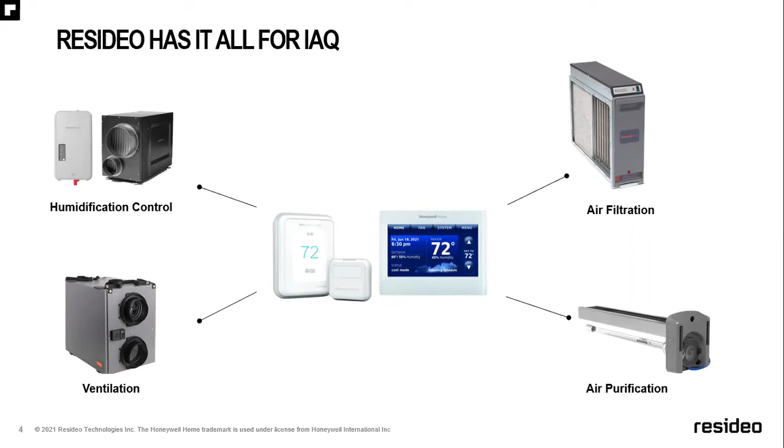I always like to start off by saying Resideo is not a one-trick pony, if you will. We actually are a very well-diversified company in terms of our offerings. Many people think of us as just the Honeywell Home thermostats, but we also are very much involved in the IAQ world. We have everything that's necessary to control your indoor air quality.

One of the reasons why I like ventilation is because it is sort of like the redheaded stepchild of the HVAC industry. We tend to think that we're the HAC industry, if you will, and sometimes the V gets left out. So it's really fun for me to teach on this and to introduce this sometimes to people, but also refresh some people on what ventilation does and why it's important and how to do it right.

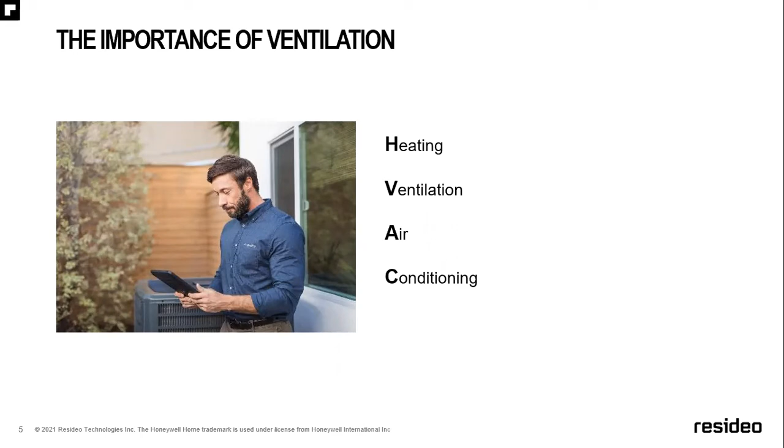So anyone who's been in the industry for any amount of time probably has heard the saying that houses need to breathe. And I always chuckle when I hear that phrase. The truth actually is that people breathe, but houses really don't need to breathe as much as we tend to think.

There's a lot of indoor pollution that can be a factor inside the home with IAQ, but there's also a lot of stuff that comes from outside. Our houses tend to act like big filters. And then of course, anything that we bring inside that has nasty stuff in it, pressed wood and formaldehyde is common, but also candles and deodorizing sprays, and those point us to the fact that not all indoor air pollutants are bad. They might be things that we want to watch out for, but nobody's going to tell you that you can't burn a candle in your house. But we have to recognize that all of those things do release things into the air.

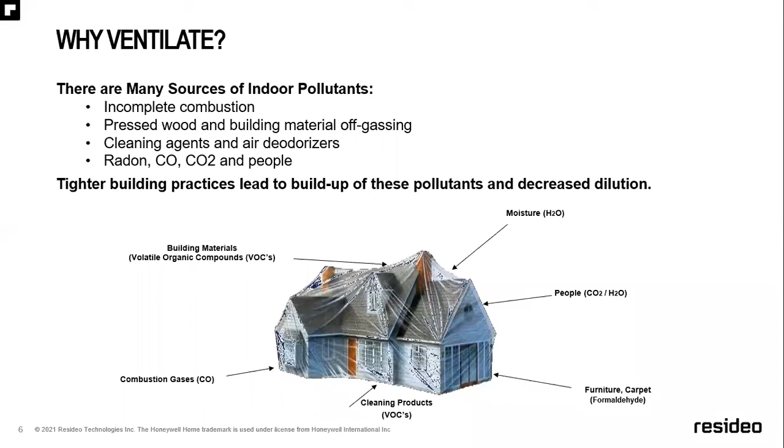So lots of stuff going on inside the house, and it's important to understand all of those things that are there. And we certainly have products and technology to help us mitigate all of these issues. But the best strategy anyone would tell you is that if we can dilute these things down to a level where they are not significant, then that is one of the best strategies. And so ventilation is where that comes in, because with ventilation we're able to actually dilute the concentration of everything that's in the house with fresh air.

So obviously we spend quite a lot of time in our homes. 90% of our time on average is spent in the home, and so we want to make sure that we have good air. Obviously indoor air pollution is a problem if we don't ventilate, but we can also have things like excessive moisture. Depending on the climate that you're in, you can have vulnerability to gases, like I said before. Mold and mildew can become a problem when you don't control for ventilation or for humidity in the air. So lots of things can happen if we're not watching out. And everybody kind of knows that. Most of us have experienced that in some way or another.

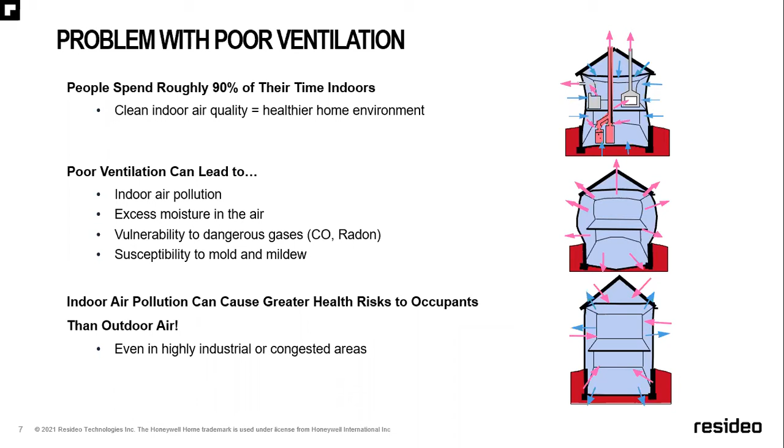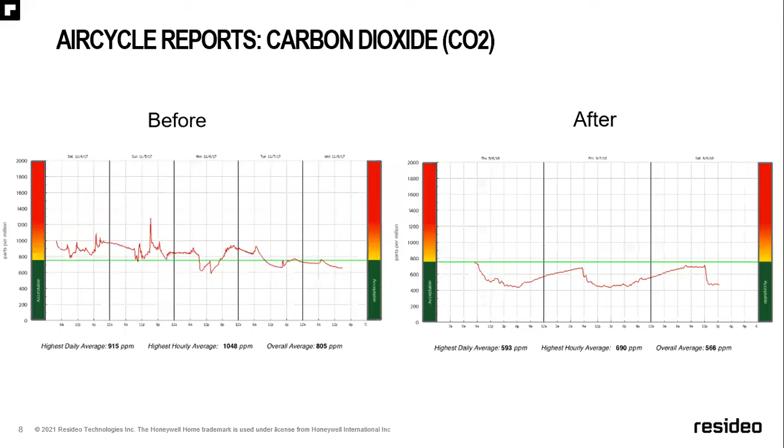And then you see down here on the after introducing ventilation, we're able to bring that down and actually keep it below the line at all times. There's still going to be fluctuation, and usually with carbon dioxide, that has to do with what's going on inside the house, like if you're cooking or if there's a lot of people there.

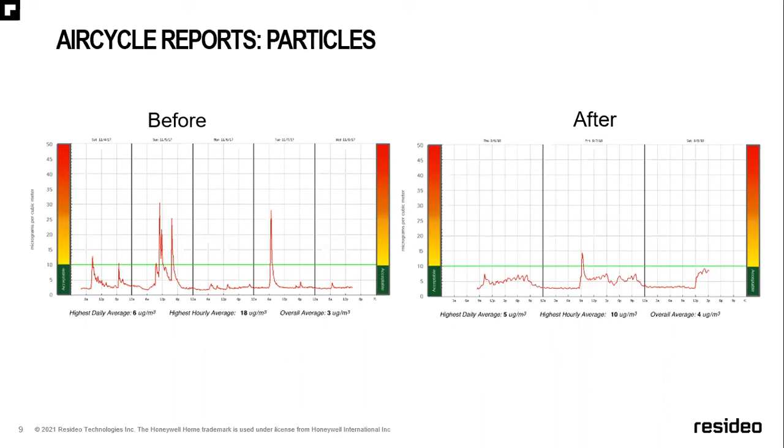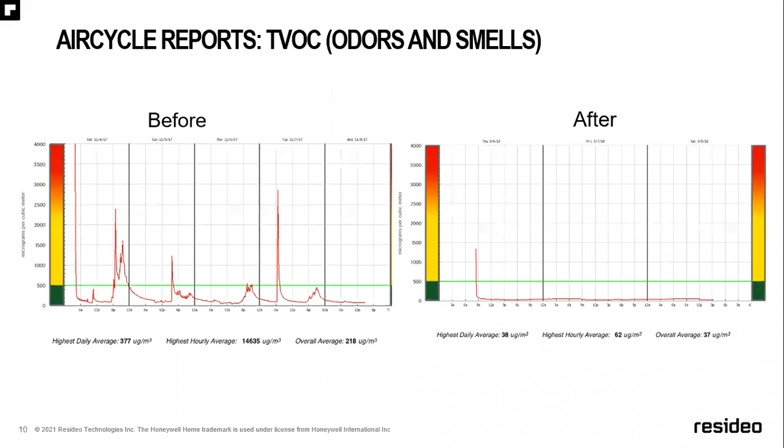There's really 3 primary ways to ventilate a home. Every home in the US built in recent years should pretty much have a bath fan. Oftentimes bath fans are looked at as being there to remove odors, but really they're there to remove moisture. And that can be a pretty scary thing, because if we go back to what I said before, we want to be in control of what comes in and out of our homes.

If you look over to the right-hand side where we have these graphics, the house up at the top is kind of squeezed, and what we have there is a negative pressure inside. So we're basically begging the air to come inside from outside. We would like to think that it's coming from the window over the garden, where the air is fresh, but more than likely it's coming from our attic, crawl space, or basement, because those are usually easier pathways. So with exhaust only ventilation, we have very little control over where the air coming into our home is coming from.

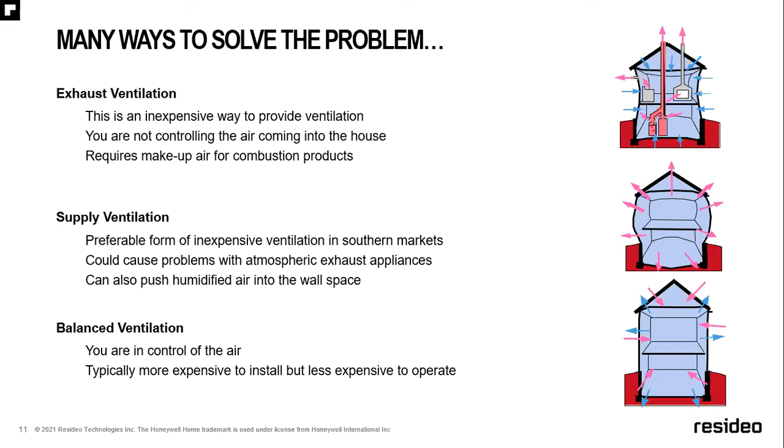There are standards for ventilation. ASHRAE actually introduced a new standard, 62.2, in 2016. There's been quite a bit of controversy over their standard, but they are the authority in the industry, and so we would do well to listen to what they say. But one thing that I think is important is that we understand the standards and we abide by them. But we also need to understand that sometimes for specific instances, we need to tweak what we actually end up with.

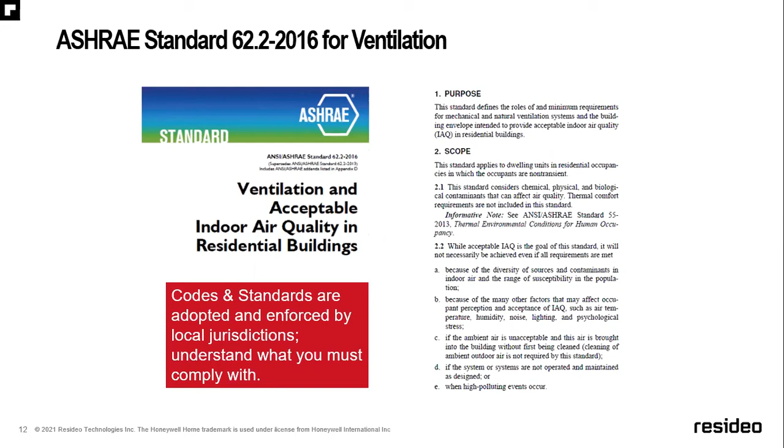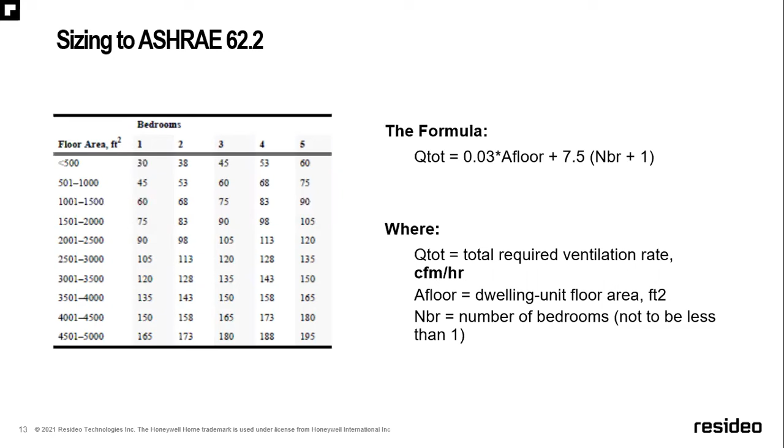And this is basically the Q total, which would be the amount of fresh air you need. You take the square footage of heated and cooled conditioned space, multiply it by 0.03, and then you add 7.5 multiplied by the number of bedrooms plus 1. Essentially, that's going to give you something close to these numbers over here. And if you use a design software, they probably have this built in. So if you're using a design software to do a load calculation or something, they're probably going to use this formula to calculate it for you.

Some of the products that we have, some really neat products. We actually have products that fall into all three categories, because we do like to have options for every situation, because there tend to be people who need each situation to be accommodated. So the exhaust only ventilation, this is not a widely known product, but it's a fantastic product.

So it's a fantastic little product. It also has a timer, a countdown timer. So if you want to set that, you basically just push the button to turn it on, and then it'll run for 15, 20, 60 minutes, however much you want.

So for example, if you were to take a shower and you had a 15-minute timer, and the shower took 10 minutes, then it's going to run an extra 5 minutes after you leave, but then it's going to shut off. It's not running all day long. So it's a really cool controller.

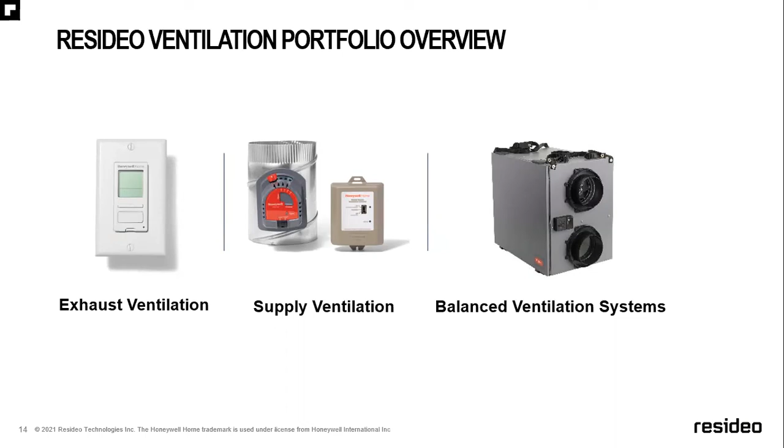And this is our small, our mid-level models, but just to kind of look at some of the models there. We have the EARDs, which are our dampers. These are more simple. The HRVs are, like I said, heat recovery.

So just one thing to note, I don't know how many out there are in northern climates versus southern climates, but if you're in a southern climate or anywhere where humidity is an issue, the HRV is not for you. So when you see the difference in the price tag between an ERV and an HRV, don't think that you just want to save a little money and walk away.

An HRV, I've seen them, if they're not installed properly, they can be bad news. So anywhere where you're looking at any kind of humidity issues, you want to use an ERV. We have 3 different sizes: the 70, the 150, and the 200 CFM system. They're balanced. They run with independent fans, both on the intake and the exhaust. And so you can actually balance your system.

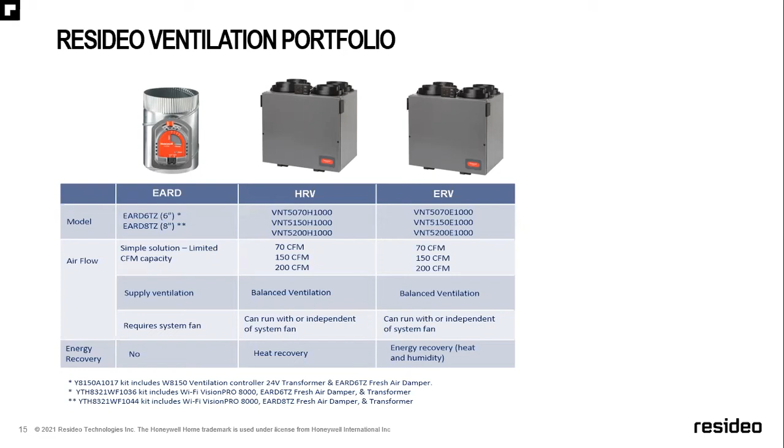The ventilation solution for exhaust only, like I said, just wanted to give you a little bit more info here. The digital bath fan control, this thing has several different modes. Like I said, it can meet ASHRAE 62.2 if you program the info in it.

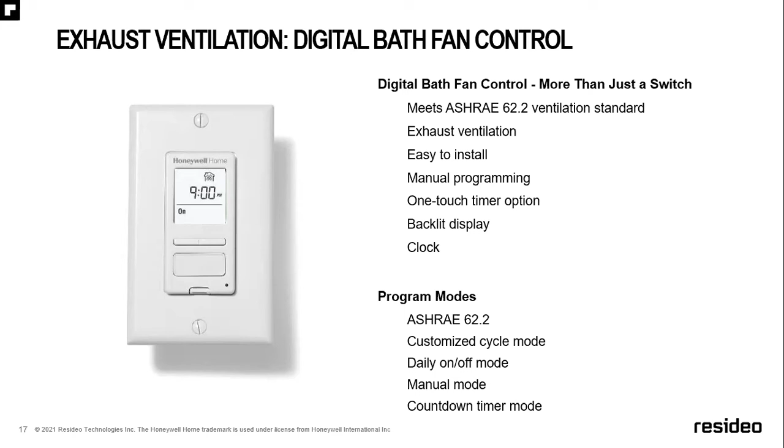You can do a customized cycle mode, where it's almost like a programmable thermostat. You can tell it when to come on, when to go off. You can have the daily on and off mode, manual, and then of course the countdown timer.

For supply ventilation, this is actually the one where I hang out most of the time. And the reason for that is, well, there's lots of reasons, but in my climate, we have lots of humidity. And so I really, really like being able to bring fresh air in through one of our dehumidifiers, which is what we do with the DR90 or the 120. We can actually use those things to control both humidity and ventilation at the same time.

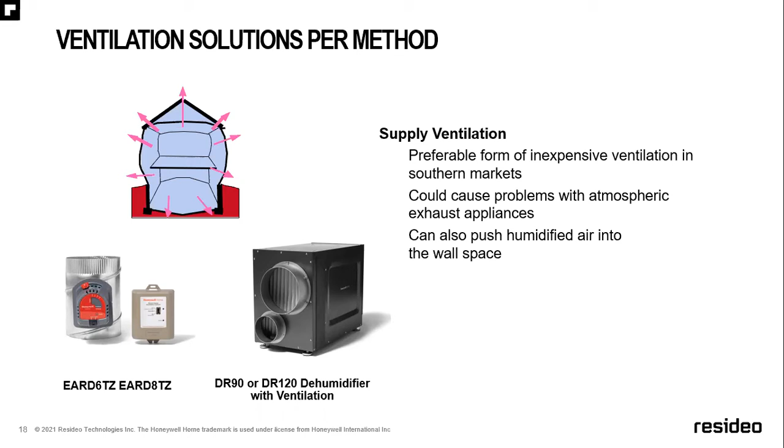But if that's not quite in the budget, then we also have the 8150s, which are also a very great solution. You can actually just program the relevant information into the controller and it'll do all the calculation for you. And even though dehumidifiers tend to be expensive, these tend to be actually a more economical solution than a balanced system.

With the 8150, we have the Y packs. If you're not familiar with our labeling, any part number of ours that starts with a Y means that that's actually a package deal. So we call them our Y packs. So the Y8150 is going to be a package that has a transformer, the damper, and the controller all in one box.

And then for this guy, you're basically going to go in here and tell it with these dials, okay, I have 4 bedrooms, I have this many square feet, and the one that trips people up a little bit sometimes, and this is important here, is that this airflow is not the desired airflow. This is actually your measured incoming air from your fresh air supply.

So whatever duct you're running from the outside to your system, you will have to measure how much air is coming in through that. And then you tell the controller how much air is actually coming in through that.

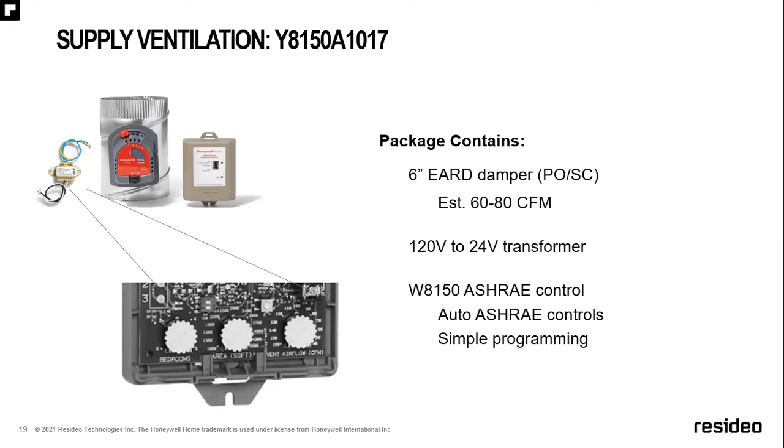It's a pretty easy system to set up. It's very customizable, and again, it's a very economical solution.

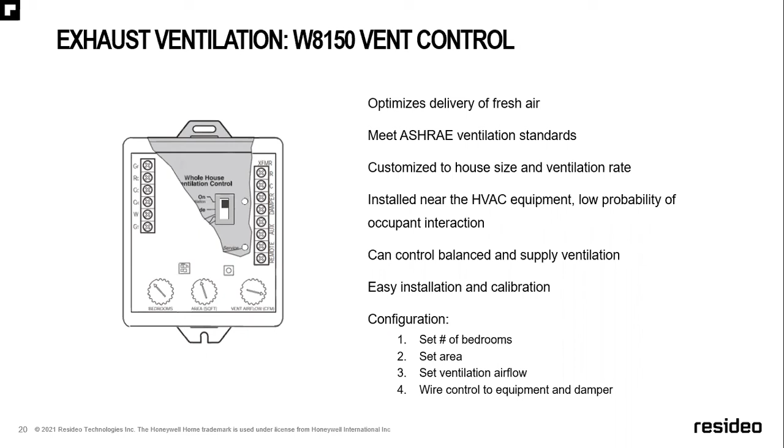We also have another Y pack that has a damper in it, and this is the YTH8321WF. The 1036 or the 1044, that just depends on what size damper you want. But this is a box that comes with a Wi-Fi 8000 thermostat and the damper.

And the reason that we would pack that together is that whereas the other one is an analog control, with the 8000 thermostat paired with this damper, first of all, it's a lot easier to set up because you just need 2 wires from the thermostat to the damper. And the thermostat will control everything, including the heating and cooling, right?

And then the thermostat's able to utilize more information, such as the outdoor temperature and the outdoor humidity, to introduce some higher level of control. And we call those lockouts. So with the 8000 thermostat and many of our other IAQ thermostats, we can control for high or low outdoor temperature, high outdoor dew point, and then we can also control for a sleep schedule.

The reason that we go dew point instead of relative humidity is because it's a much more accurate predictor of introducing humidity problems through ventilation than relative humidity.

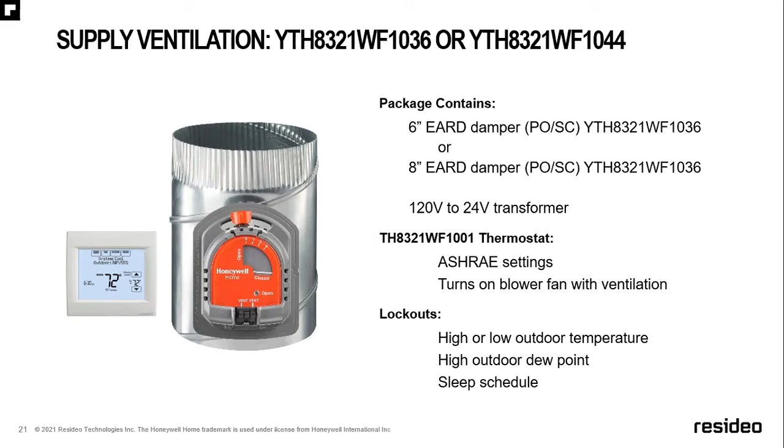So this example here is just kind of showing you, if you're doing supply only ventilation, what a calculation might look like. So if you had a 2,000 square foot home with 2 bedrooms, ASHRAE 62.2 would require 60 CFM of continuous fresh air. That's a whole lot of fresh air, but according to that calculation, that's what you'd need.

So with a 6-inch duct, assuming that it's giving you 60 CFM, which is an average, you would have to have that duct running 100% of the time. And then of course, if you went up to an 8-inch duct, which is going to deliver twice that much airflow, then you would only need it to be running 50% of the time.

Our ventilation systems are going to introduce into their intelligence their knowledge of when the system's blower is running. So it's going to try to optimize the ventilation cycle with the fan run cycle, whether you're in heating mode or cooling mode. So it's going to try to engage your system fan as little as possible during times when there's no heat or cool call. If the heat and cool doesn't run enough, then of course it will engage the system fan independently, but usually it tries to optimize that.

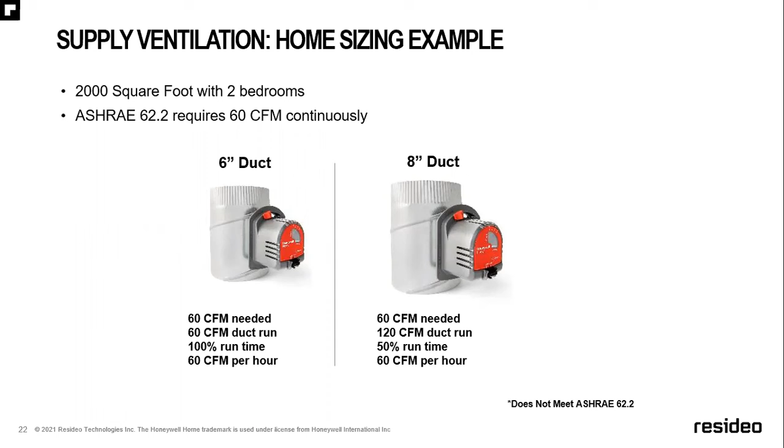A great way to mitigate the problem of bringing in fresh air and humidity at the same time, which is something that we deal with all the time here in the Southeast, is to bring in your ventilation through a dehumidifier. I like to talk about this as, when you do this, you're kind of getting double for your money. A dehumidifier is not going to be that much more expensive than an ERV. And yet with a dehumidifier and a damper, you can both introduce ventilation and control humidity all year long.

And you can control that humidity not only on the incoming air, but you can also dial in a home's indoor humidity throughout the year at any point, independent of the air conditioning cycling, which is just a fantastic thing. If you've ever lived in a home where this is the system that's installed, it's absolutely incredible, because you don't depend on your heating and air system to dehumidify your air, which means that your system is going to run much more efficiently.

And in the shoulder seasons, like today, I'm in Northwest Georgia right now, and it is not very hot outside, but it's almost like a swimming pool. So on a day like today, my air conditioner is not going to run very much, but with a dehumidifier installed, I don't need my air conditioner to run in order to keep my humidity under control. And then we add to that equation the ability to run your fresh air through the same system. Then you have just fantastic control over both systems.

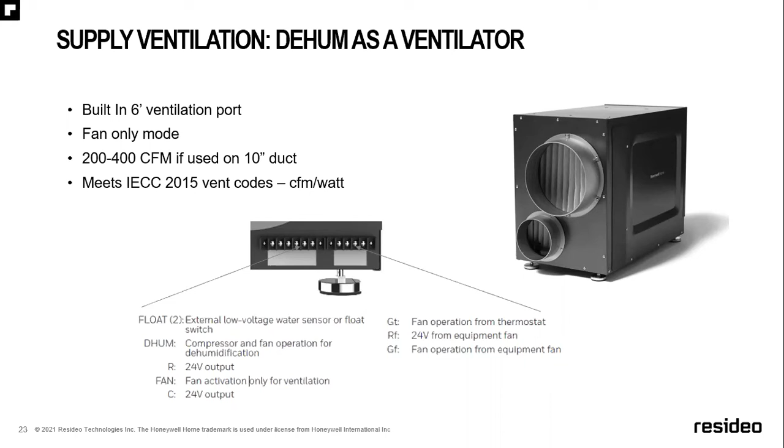And then of course, the dehumidifier doesn't always have to run with its compressor on. We've built them so that they can run with their fan only, in order to bring in fresh air as needed without bringing on the dehumidifier if that's not necessary.

So the gold standard, if you will, is going to be the balanced ventilation. So if the supply only ventilation is not your style, and you want to really dial it in, then you are going to go with this balanced system, right? So with this, you're in total control. You know every bit of cubic feet of air that's coming in, and you control every bit that's going out, assuming you have a tight house.

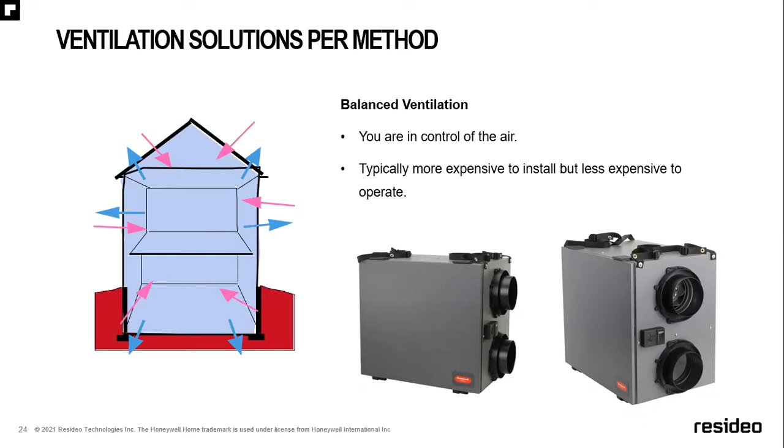And so these systems are really just cool. I do really like these, but they tend to be expensive. I've mentioned this before, but again, it's worth repeating. There's ERVs and HRVs. They're very similar. They both supply and exhaust air, and they both recover heat from the exhaust process.

But an ERV is going to also recover humidity, which means that while the air is being exhausted from the home, it passes through a matrix, and inside that matrix, the air does not mix, but the humidity actually transfers through that material, because humidity always moves from high concentrations to low concentrations. So assuming that the air outside is a higher concentration of humidity, as the exhaust air leaves the home, it's going to pick up a good amount of the moisture that's in the incoming air, and it's just going to take it right back outside. And so you end up with a pretty good exchange, and they usually are about 70% efficient.

And you might think, well, that means that 30% of the heat and humidity of the outdoor air is coming in through that. And that is correct. However, if you think about it, your space is going to be a certain amount of cubic feet. And that would be a problem for your equipment if you were to all of the sudden change out all 8,000 cubic feet of your room. Let's say you had a room that was 8,000 cubic feet.

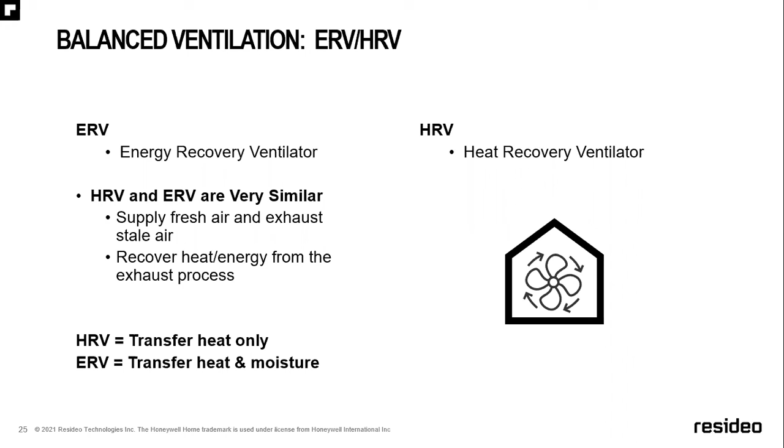If you suddenly exchanged all of that air for outdoor air at a 70% efficiency, then yes, your main heating and air system would have a big job on its hands, and it might not be able to keep up. But these things are continuously running, and they have much lower CFM than the 8,000 cubic feet that you have. So that process is kind of like a trickle process. So your heating and air system is going to have no problem keeping up with that.

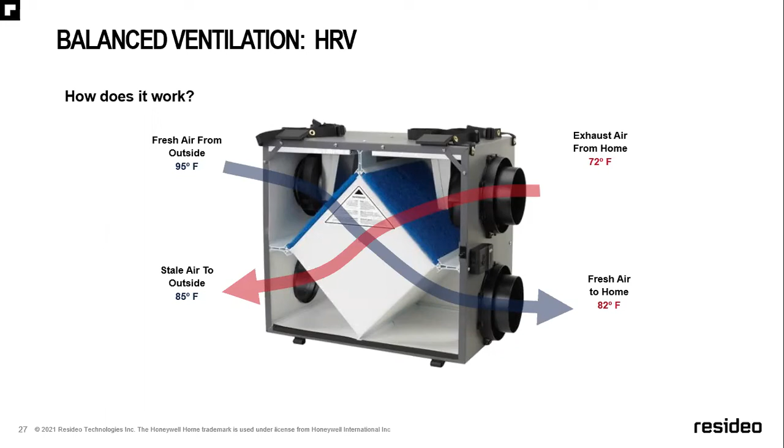So here's a good diagram of kind of how these work. If you take fresh air from outside at 95 degrees and you bring it into the house, as it's going through this matrix here, it's not going to mix, but there's very tiny holes that kind of form a weave through this box here. And as the air from the home, which is 72 degrees, is going through the box at the same time as the outdoor air, the outdoor air is losing its heat to that cooler air, which is picking up that heat and taking it right back outside.

And then if you look at an HRV or an ERV, we add to that the relative humidity of the air, and we get an exchange both of the relative humidity and the actual temperature of the air. It's really a neat process to watch. The bulk of the expense of the HRVs and ERVs is in this little matrix here, this square box in the middle. The good news is those are permanent parts. They do not need to be replaced. They don't wear out. And there are filters on both sides.

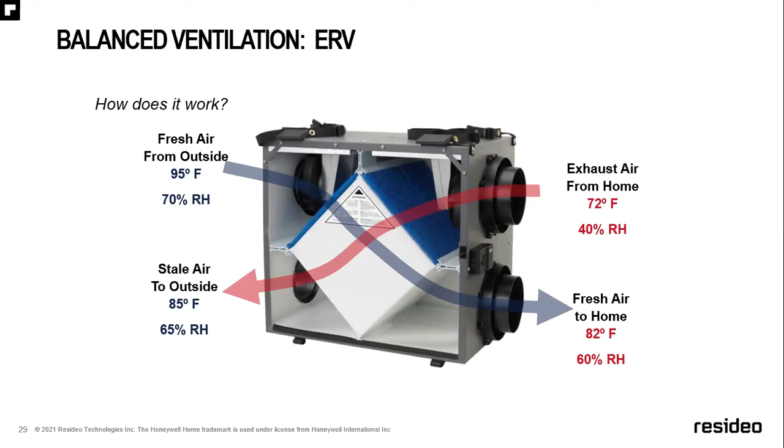You can see this blue mesh filter. That is a washable filter. And so we're going to keep those pretty clean. That's the maintenance component of it, is that you need to just check to make sure that these filters are not too dirty.

So balanced ventilation, some of the cool features on our system, just for installation sake, there's some really neat stuff where the duct collars are easy to take on and take off, so you can attach your ductwork in basically an easier environment. Makes the install a little easier. They come with really good straps, so you can hang them from the ceiling of your basement, or you can hang them from the rafters in your attic. And that definitely is going to reduce the vibrations.

But if you've ever seen or heard one of these things run, they are so quiet. It's almost hard to tell if they're on or not. And then we don't need to use dampers because there's actually two motors, one that drives exhaust and one that drives intake. And the reason that we do that is because you may not have the same exact ducting situation. So you may need more speed on your exhaust motor or more on your intake motor, just to get a balanced CFM, and you can adjust those motors independently.

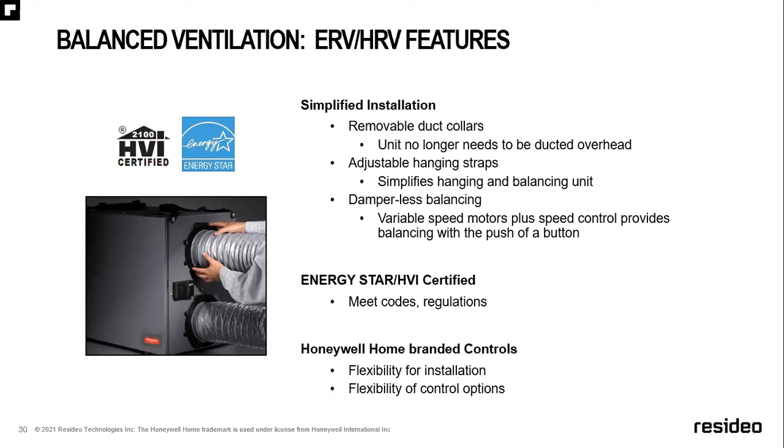And that independent control is actually right there on the box. So it's really, really cool. You can see right here the speed control on this side of the box. With just a few buttons, there's a really cool way to kind of balance these things and switch from one motor to the other. So it's actually really, really simple to do.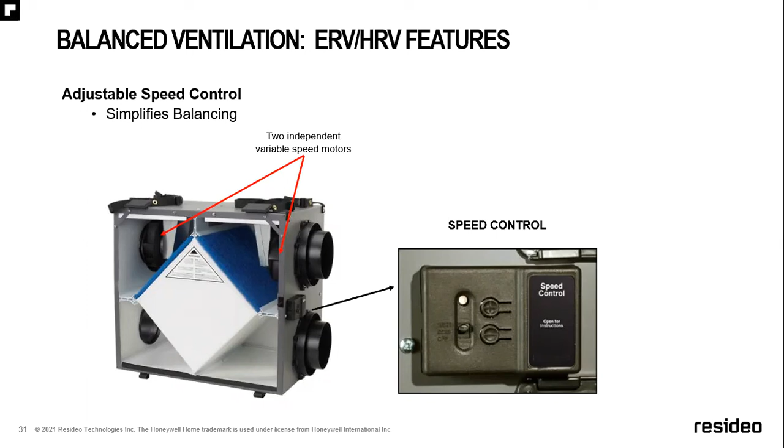You'll see as you do it that one motor will ramp up and one will slow down. All of the wiring is also right behind this front panel here. And there's lots of different ways to wire these things up. You can run them with a thermostat, you can run them with independent controllers, you can run them with that 8150 controller that I showed you earlier. So lots of different ways to wire those in. Pretty much if you can imagine it, we can accommodate it.

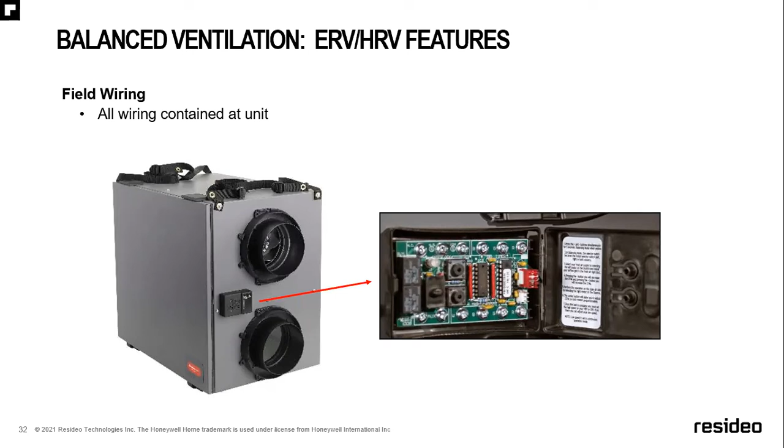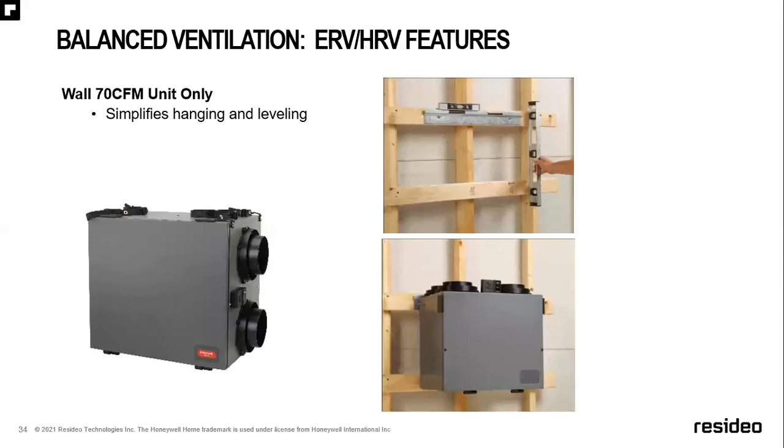I already mentioned the straps. I think that this makes it really easy to install. But then, of course, on the smallest one that we have, which is the 70 CFM, this unit is actually pretty tiny, and so we have this little mounting bracket. It's almost like hanging a big picture or something, but you can just mount that bracket on a wall, and it just basically hangs there, which is really neat.

I think I already talked about the removable collars. I'm sorry, I get ahead of the slide presentation sometimes. But one thing that you'll always hear from us is that installation is key, right? We can make excellent products, but if they're not installed properly, then they may not work the way they're supposed to, right? So one thing that we do put a lot of time into is thinking about how do we design these things so that the install is as simple as possible. And in my opinion, these removable duct collars, it seems like a simple thing, but they really do go a long way.

Now, one thing I am going to make a little joke about here is that in the picture we showed duct tape, right? We know that that is not going to be a good way to hold anything over any kind of long-term situation. So we want to make sure that I call that out. If you attach this guy, please use a little bit of duct mastic and a really good zip tie.

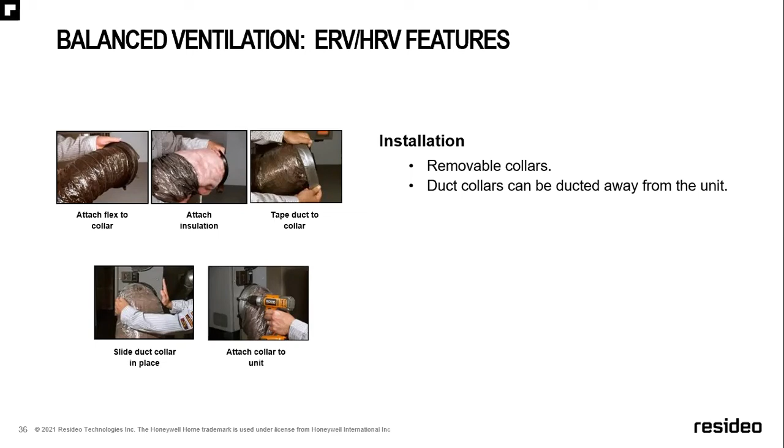And then when you attach your insulation and your vapor barrier over your insulation, again, please use a good zip tie. And if you want to tape over the zip tie, that's awesome. You're awesome for doing that. But the long-term holding onto that collar is going to happen with the zip tie. So just a shout out there for all of those sticklers for duct leakage.

So I did mention before the core, this little matrix here, this little box, you see the guy holding it up. You're going to want to remove and clean those yearly, or maybe more often if it's necessary, but usually it's going to be something around a year. And then you can just wipe the inside of the unit down if there's a lot of buildup there.

It's important to remember that in some climates there's actually going to be frost buildup on this thing, and it can also condensate. So there is a drain line, and we want to make sure that that drain line does not clog. It's not going to be a bunch of water usually, but it can be in certain situations. So we want to make sure that that drain line does not get clogged.

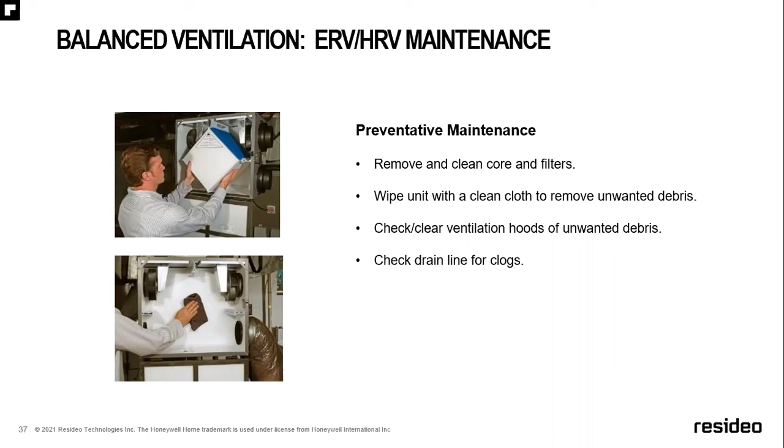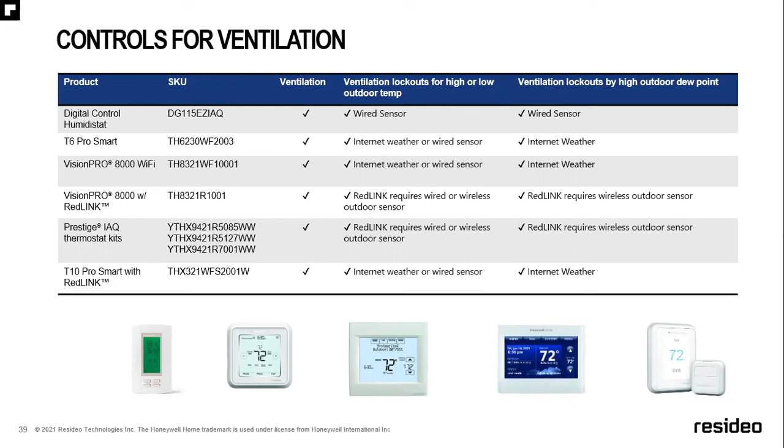And then of course our T10 is a great option as well. That one's going to be able to do one of the three types of control. So ventilation, humidification, or dehumidification.

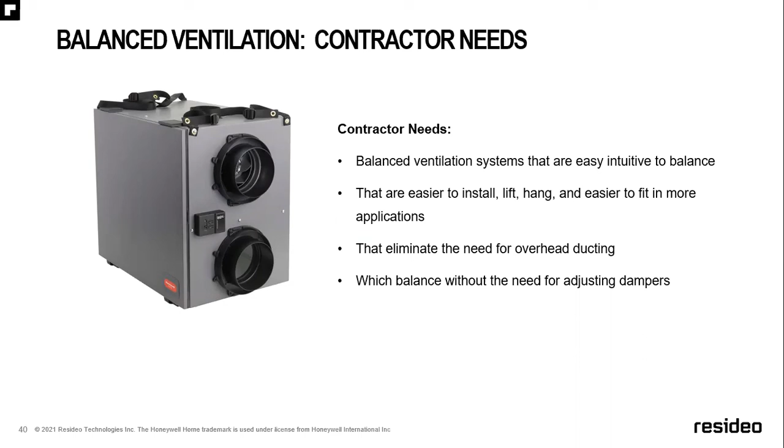I'm sorry, I skipped ahead there. I just want to touch on this one more time. If you're looking for something that is easy to install and really easy to set up and commission, these ERVs and HRVs are really what you're looking for, because you really don't need a whole lot of extra stuff to do it. And if you wanted to just run them on a permanent constant mode where it's just always on, you can actually do that from the speed controller itself. So there's lots of flexibility here.

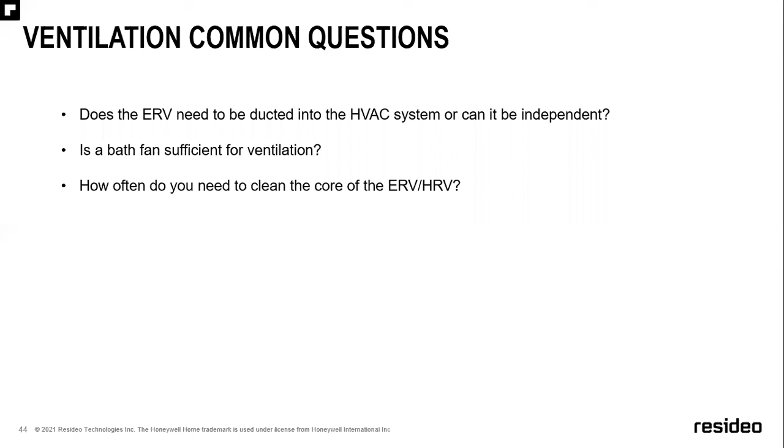So for the Q&A, I see that we have one question, and Jamie would like to answer that, I think. Yeah, I just marked that for us. Good question coming in from one of our attendees. Can we use an ERV in the north during the winter to keep moisture inside the home? Winter can obviously be a little dry.

Well, yeah, that's a fantastic question. So the cool thing about an ERV is that, well, it uses physics, right? And I'm not a physicist, but I do know enough about physics to know that moisture is going to migrate from high concentration to low concentration. So if the air that's coming out of your home is higher in humidity concentration, as it passes across that dry incoming air, it's actually going to put the moisture back into that incoming air, which is exactly opposite of what you might do in a hot, humid climate, right? So the moisture is actually going to migrate in the correct direction, if you will. Does that make sense? I hope that makes sense, because it's going to go from high concentration to low concentration.

So in the summer, which was the examples that I used, because I'm from the South and we don't really care about humidity in the winter. But in the summer, you've got high humidity coming in, and as it passes across that low humidity air that's coming out of the house, it actually gives a lot of that humidity to that exhaust air, which is then pushed right back outside. But in the winter, when the situation is reversed, the ERV, simply because of physics and with no additional controls, will actually reverse that cycle. So the answer to your question is that yes, it can keep moisture inside the home. Of course, you got to remember that it is not 100% efficient. It does have an efficiency loss.